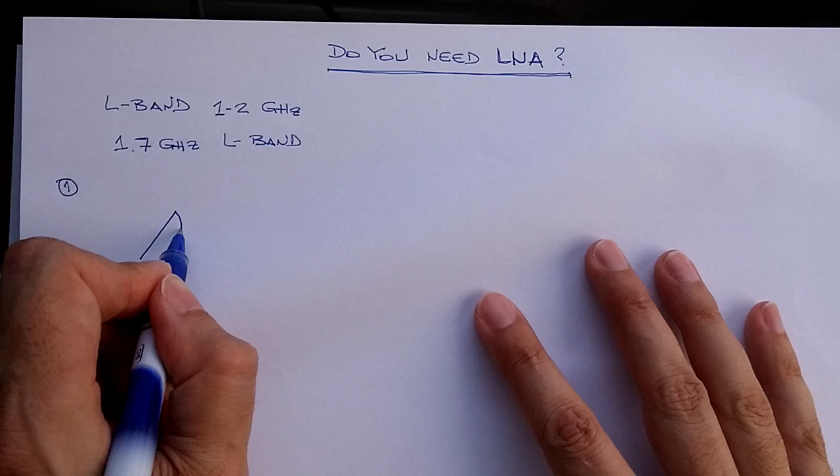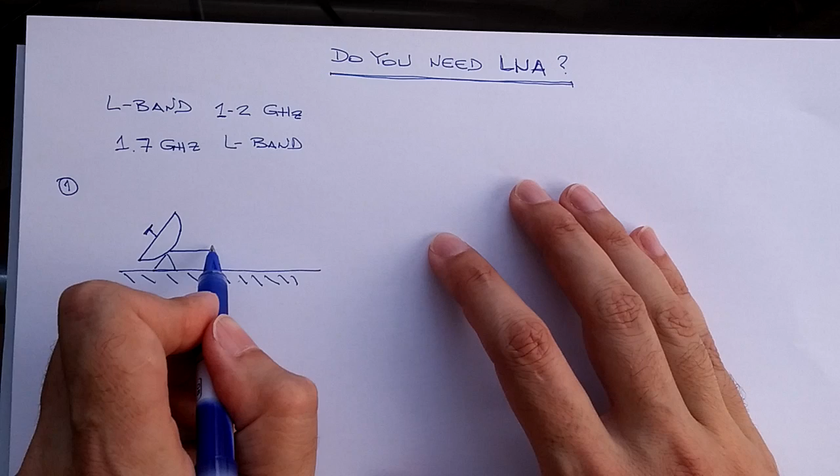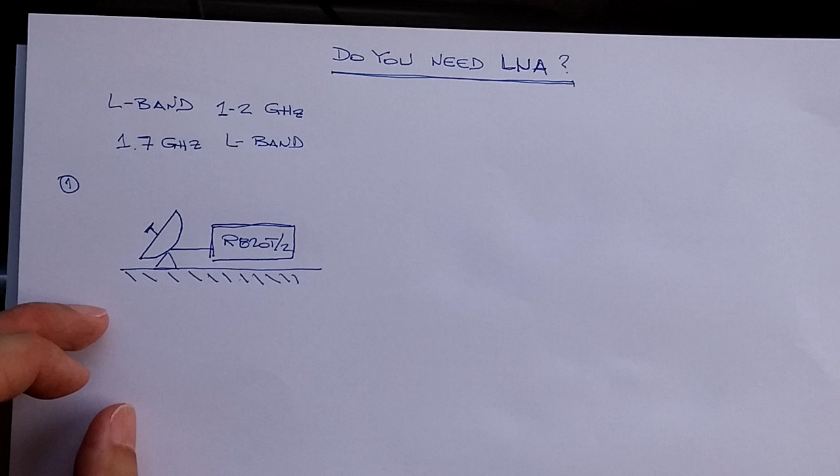And we will take the standard setup where we have the dish antenna for the 1.7 gigahertz, and we have connected straight to the feed, widely used, let's say, DVB-T dongle with R820T or T2 dongle. What we are looking for is the system temperature using the antenna and the dongle.

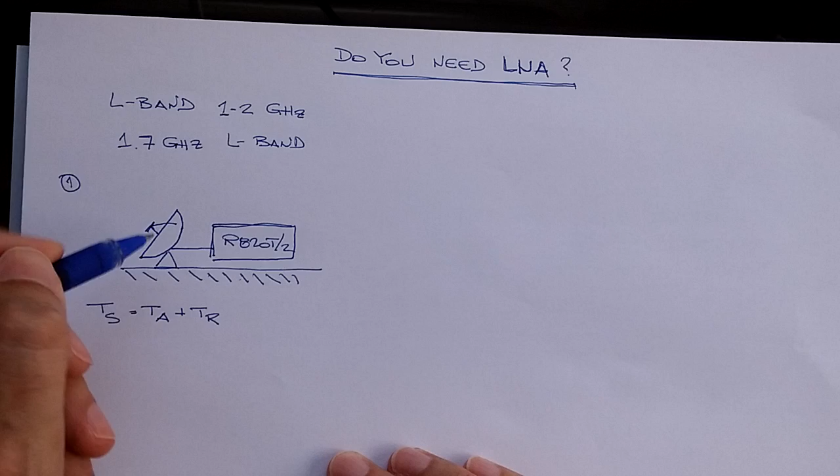So TS is equal to antenna temperature plus receiver temperature. A properly designed antenna should see just the sky, so mainly the temperature of the antenna is dictated by the temperature of the sky the antenna sees. If the antenna is properly designed, this means that the feed is properly designed to not have a spillover. Otherwise we will see the hot ground, and the temperature of the ground is 290 degrees Kelvin.

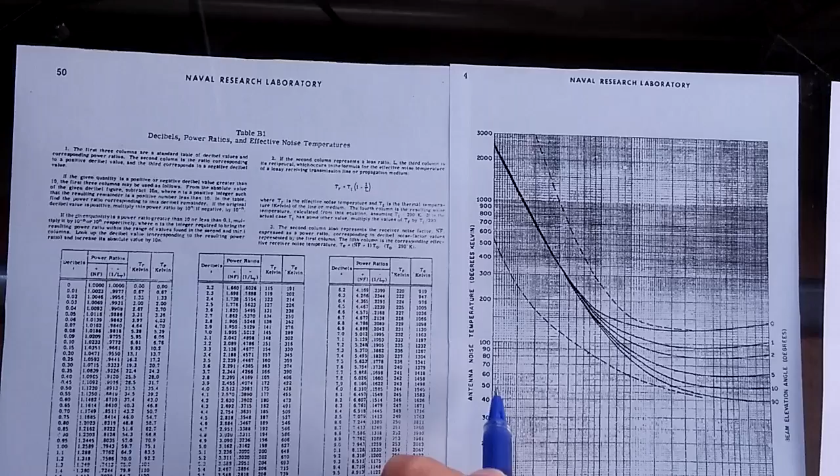It's much better to have an under illuminated antenna, so to have less gain in reception rather than spillover, and to take the noise temperature. So the average noise temperature on 1.7 gigahertz for the elevation, let's say 45 degrees, is 55 degrees Kelvin. So TA is 55 degrees Kelvin.

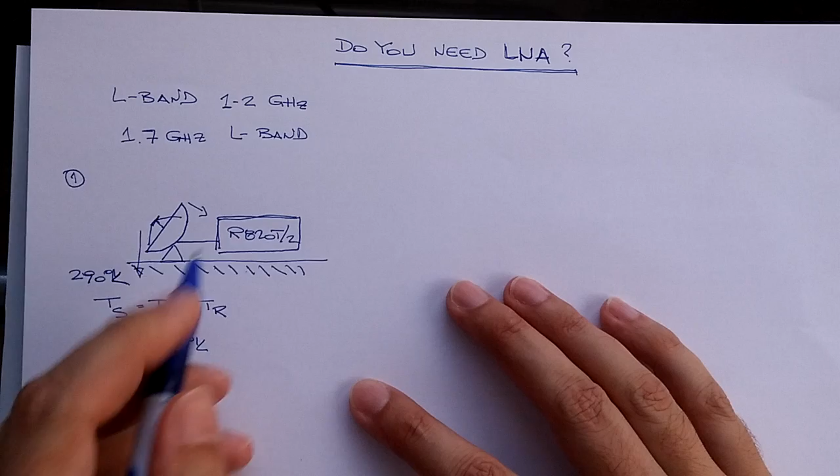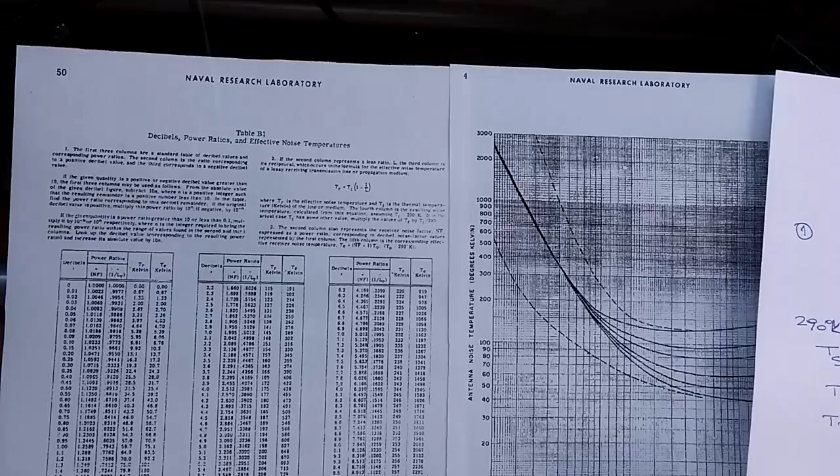TR is actually the noise figure of the dongle. Usually the noise figure of the R820T or T2 is 6 dB. 6 dB is corresponding to 864 degrees Kelvin. So system temperature is 55 plus 864, which is 919 degrees Kelvin.

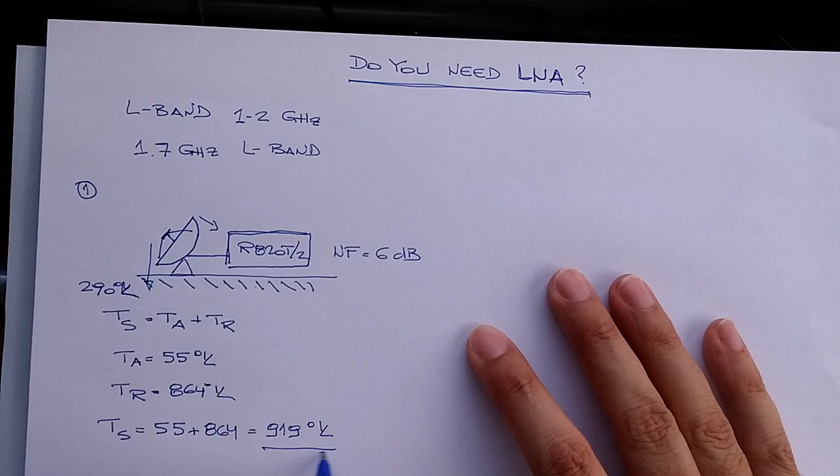Okay, so this is the first situation, the standard one, when we have the dongle straight to the feed. Let's now analyze the same system, so the same antenna with the same feed.

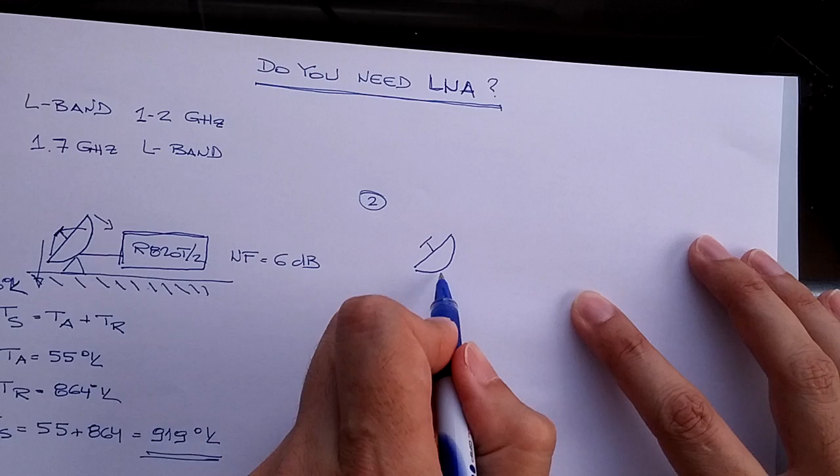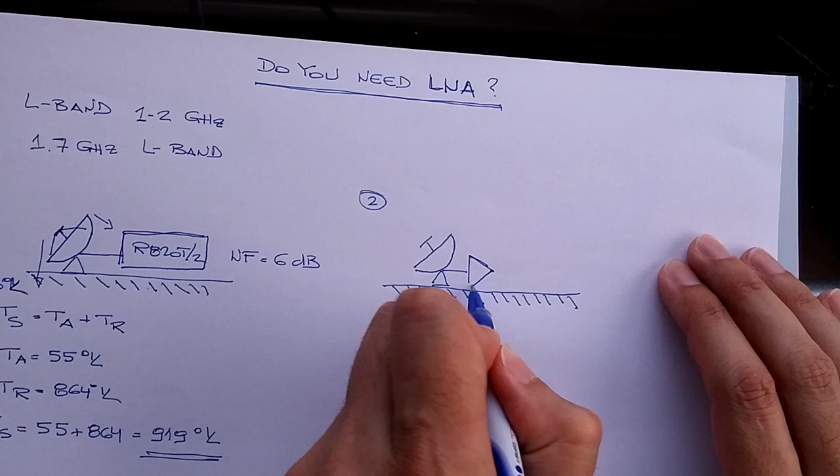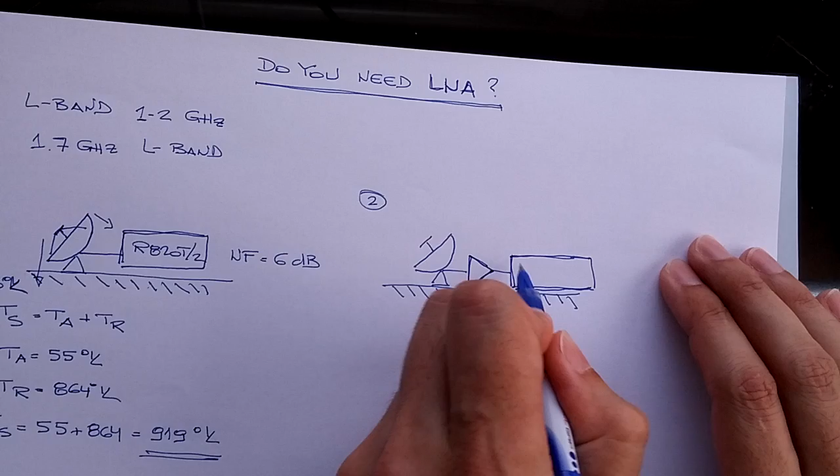But in this case we will first have an LNA, and then the LNA will be followed with our R820T dongle. And we are looking for the system temperature.

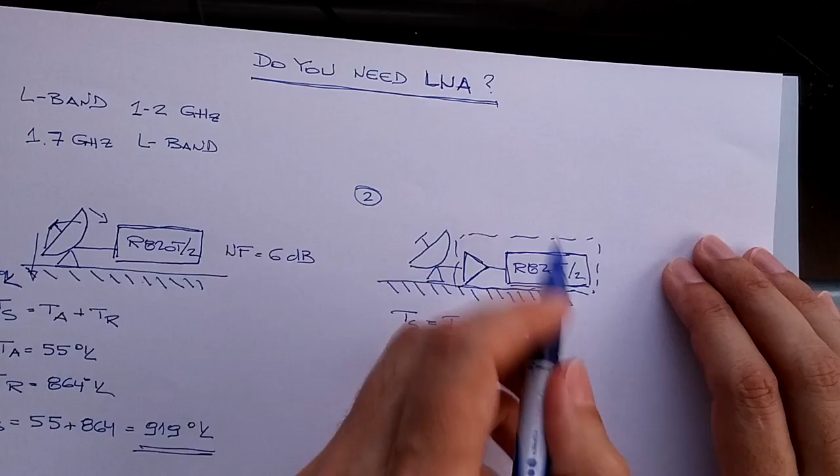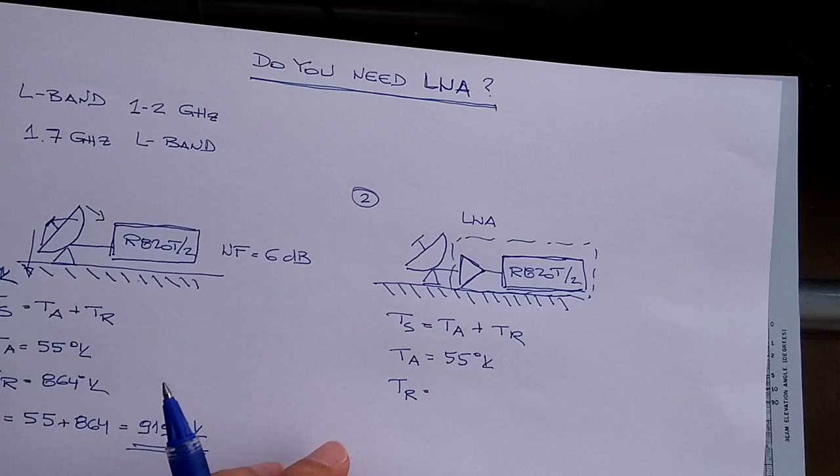Again, TA plus TR. TA, we already found that the antenna temperature is 55 degrees Kelvin. And we need to find out now the receiver temperature. It means LNA and the dongle.

For that we will use the Friis formula for the noise temperature. And the Friis formula goes like this: TR in this case is equal to T LNA plus T R820T divided by the gain of the LNA.

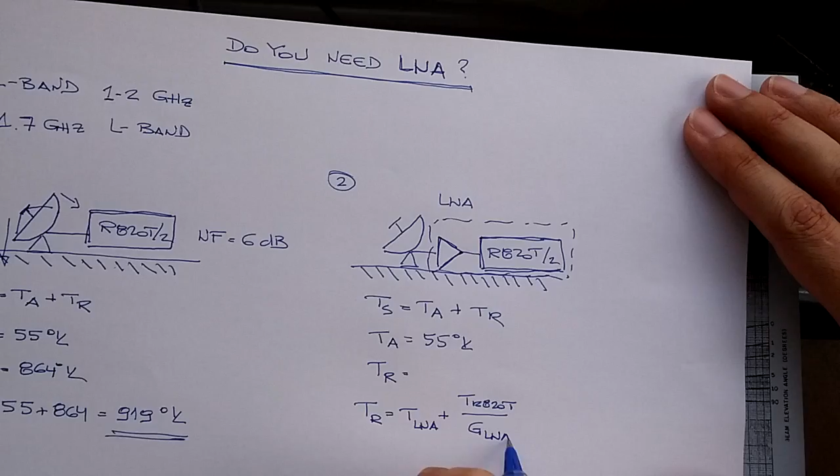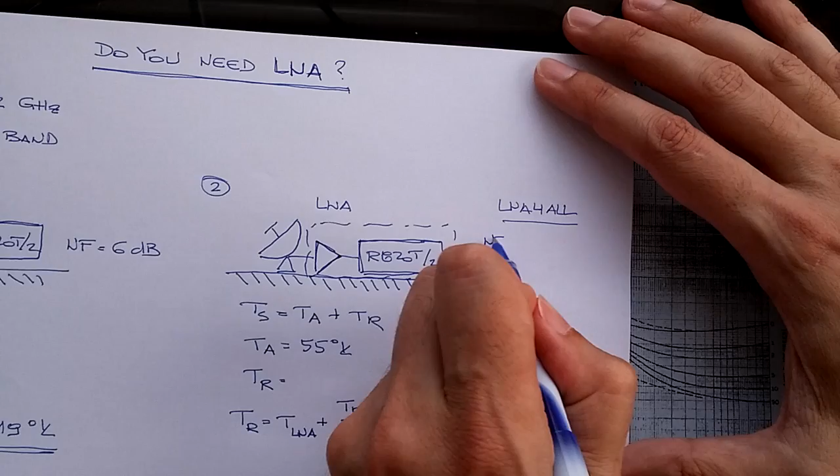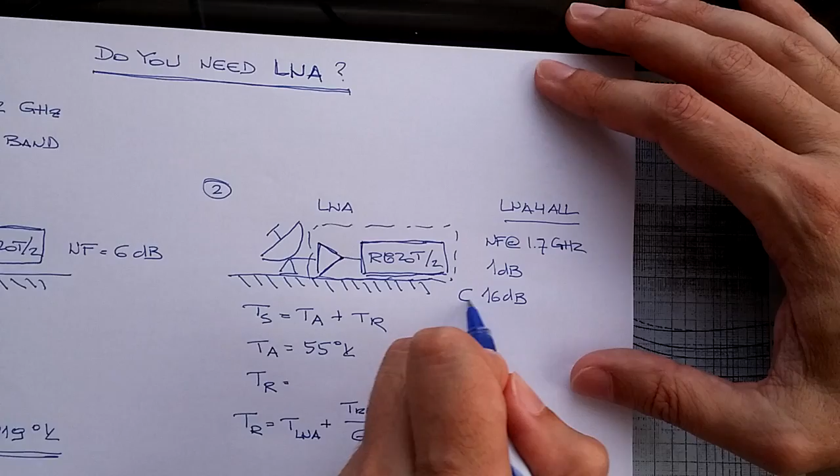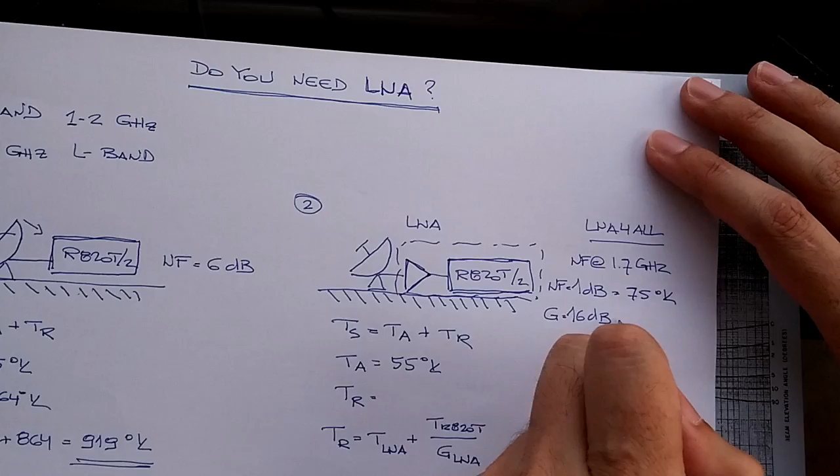Okay, let's use the LNA4ALL. Noise figure at 1.7 gigahertz is approximately 1 dB, and the gain is 16 dB. So this is the gain, and this is the noise figure. 1 dB converted to temperature is 75 Kelvin degrees, and 16 dB in power ratio is 40 - 20 dB is 100, 17 dB is 50, 16 dB is 40.

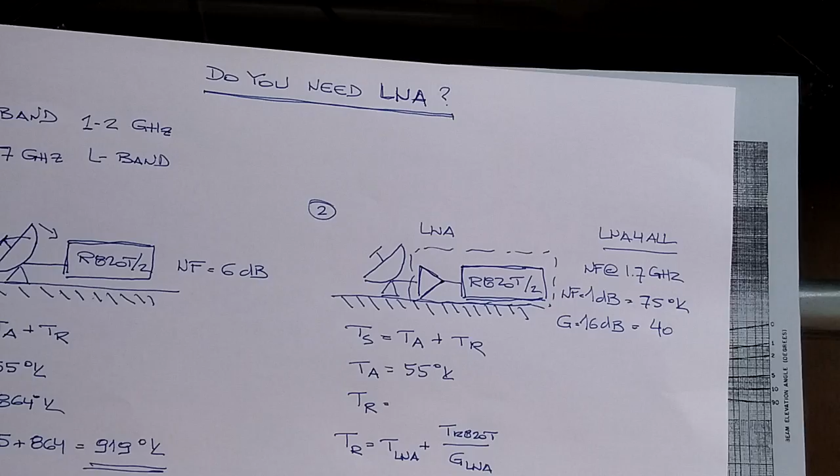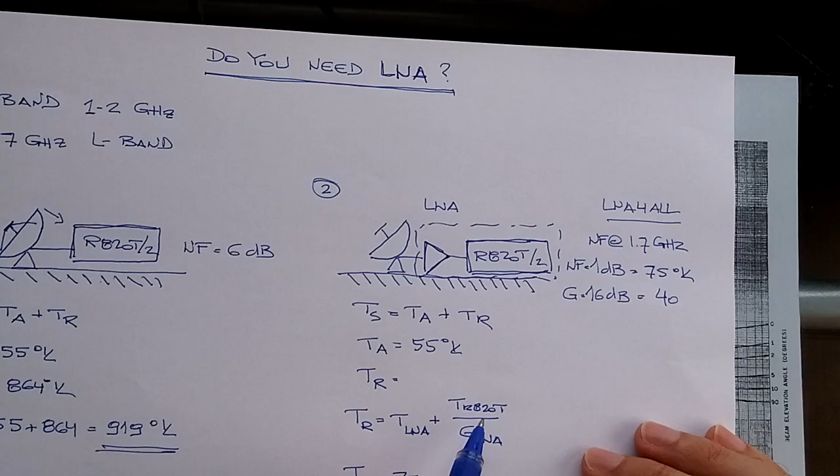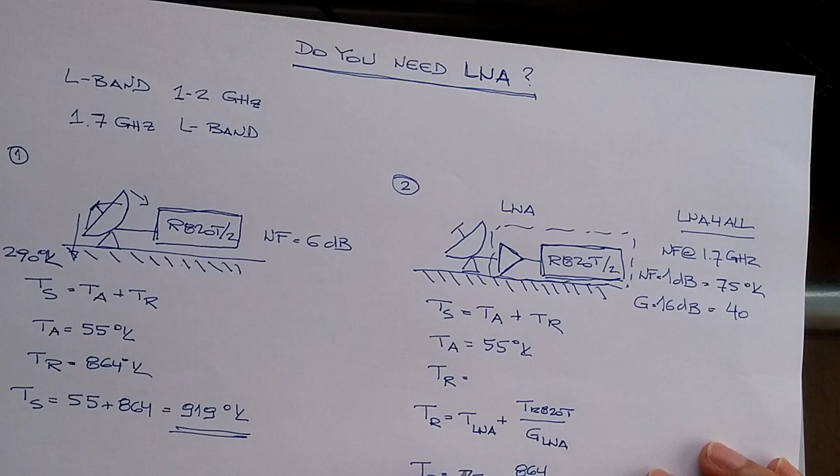Now we have everything to calculate receiver temperature, TR. T LNA is 75, plus dongle temperature, which we found is 864, divided by 40. So from here we can see that the influence on the receiver temperature, or complete noise figure, depends mainly on the first stage - the noise figure of the LNA and the gain of that same first stage - as the second stage noise figure is divided by the gain of the first stage. So we would like to have as low a noise figure as possible and as high a gain as possible.

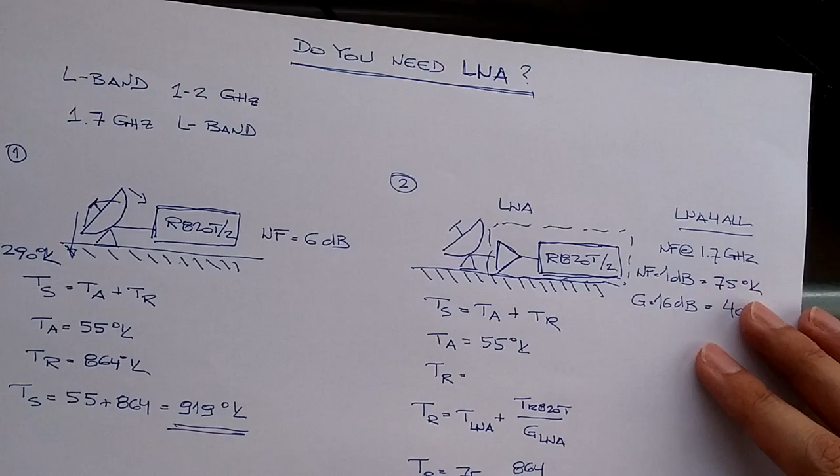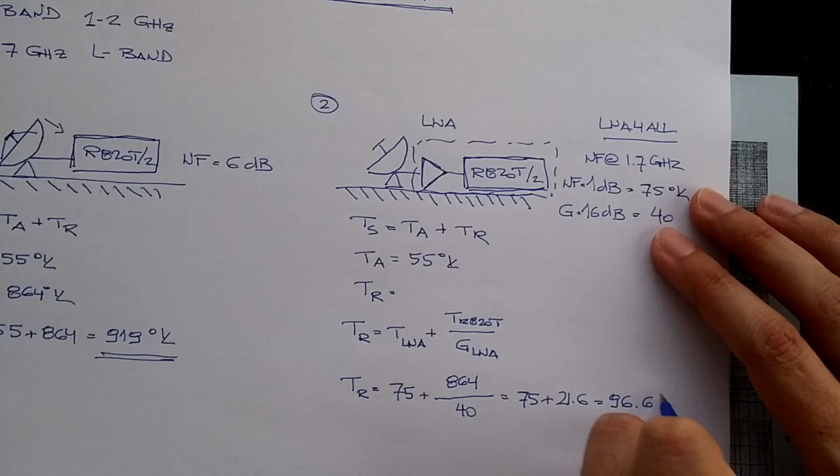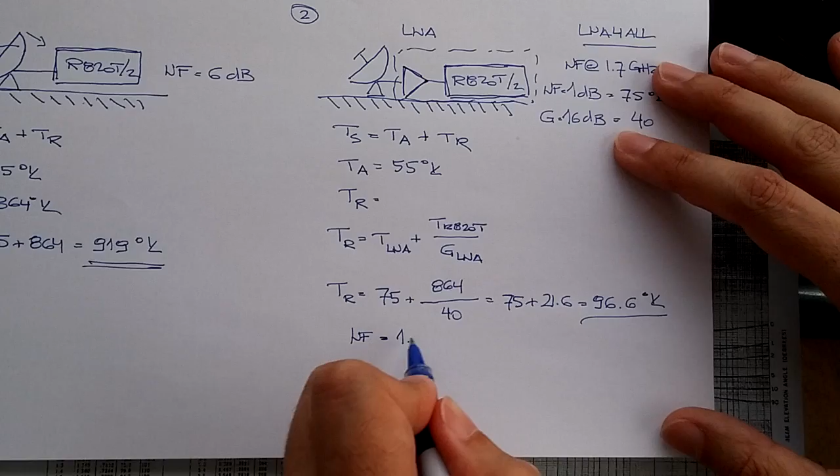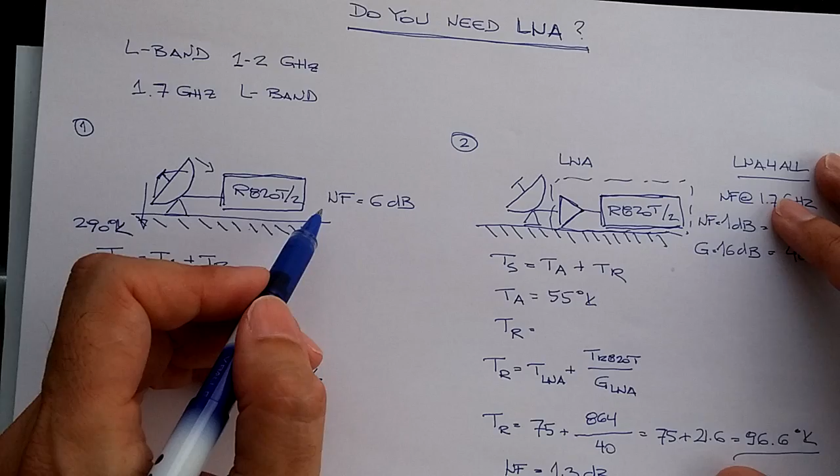So this is 75 plus 864 divided by 40. 864 divided by 40 is 21.6. This gives 96.6 degrees Kelvin. So if we convert that to decibels, 96, okay, 101 is 1.3 dB. So roughly, the noise figure is 1.3 dB. So adding the low noise amplifier before the dongle, we decrease the noise figure from 6 dB to 1.3 dB. So the difference is 4.7.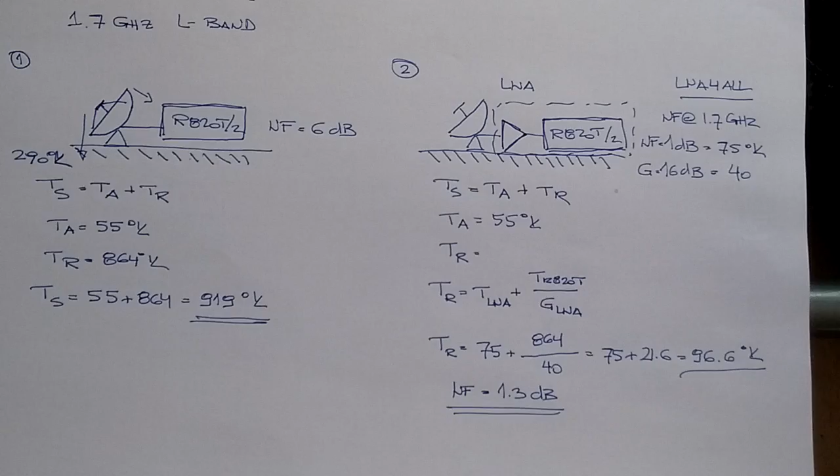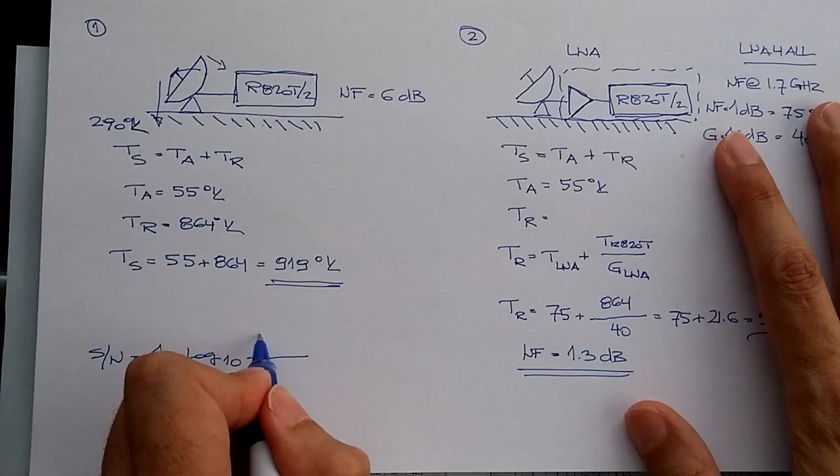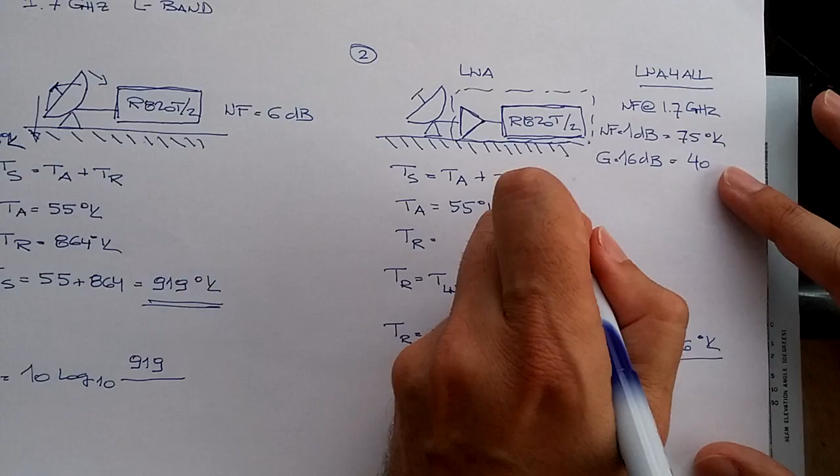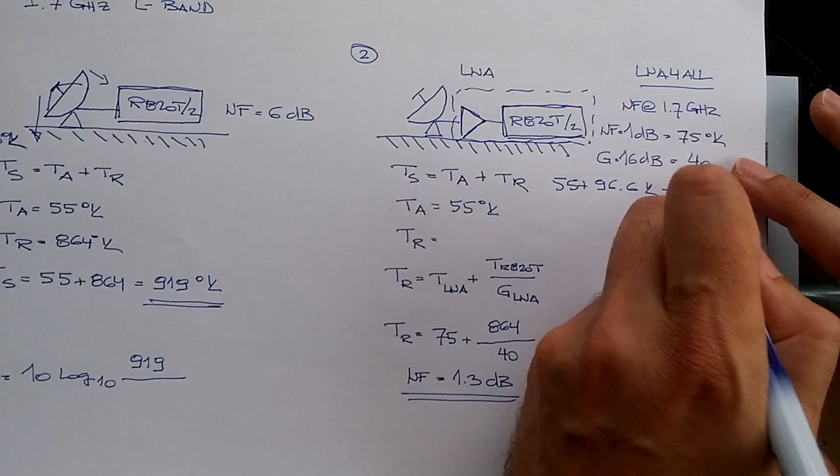So how does this affect our reception, our signal to noise ratio? Now we can calculate signal to noise by 10 times logarithm base 10 of TS without LNA, so 919, divided by TS with the LNA. So TS is TA plus TR - it's 55 plus 96.6 Kelvin, and this is 151.6 degrees.

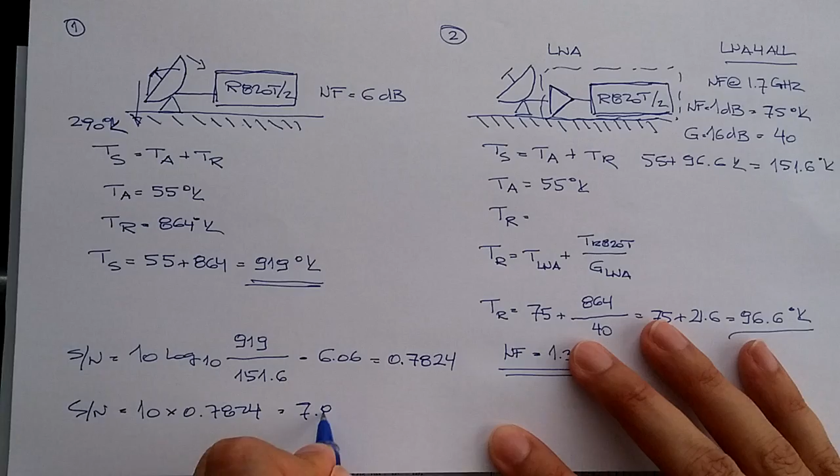So 919 divided by 151.6 is 6.06. Now we need to do the logarithm. It's 0.7824, and we need to multiply this by 10. So 10 times 0.7824, and we have the signal to noise ratio of 7.824 dB.

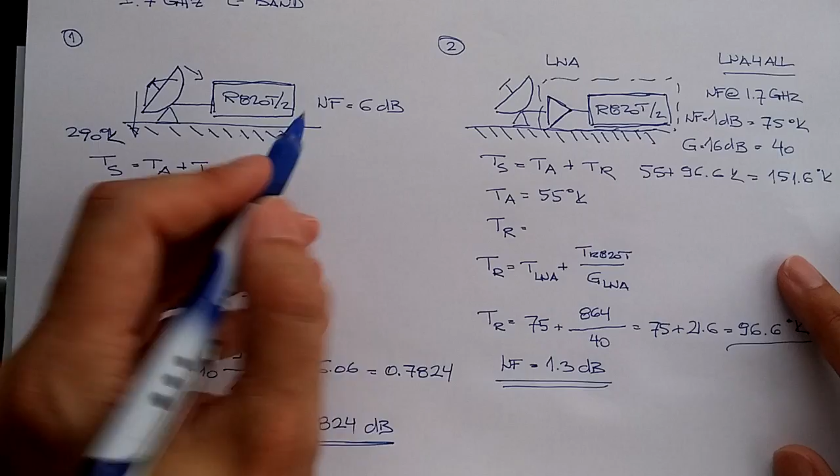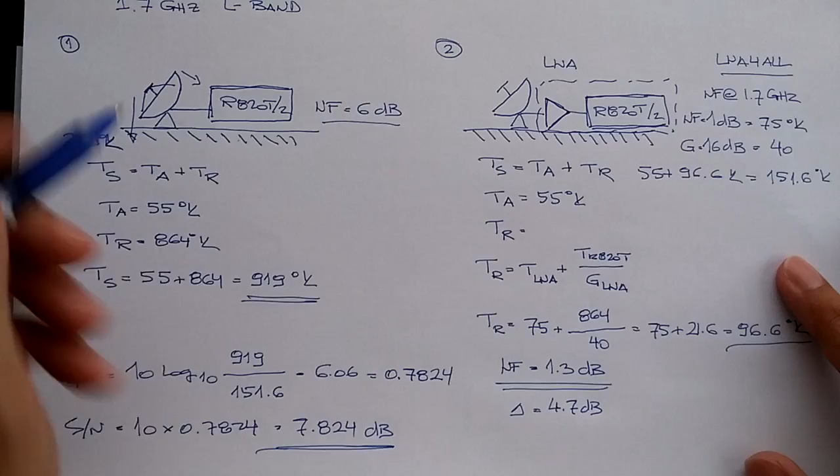Okay, now we have everything calculated. We decrease our noise figure from 6 to 1.3, so the difference is 4.7 dB. We improve our noise figure, and 4.7 dB gives us a better signal to noise ratio for any signal on 1.7 gigs - 7.8 dB.

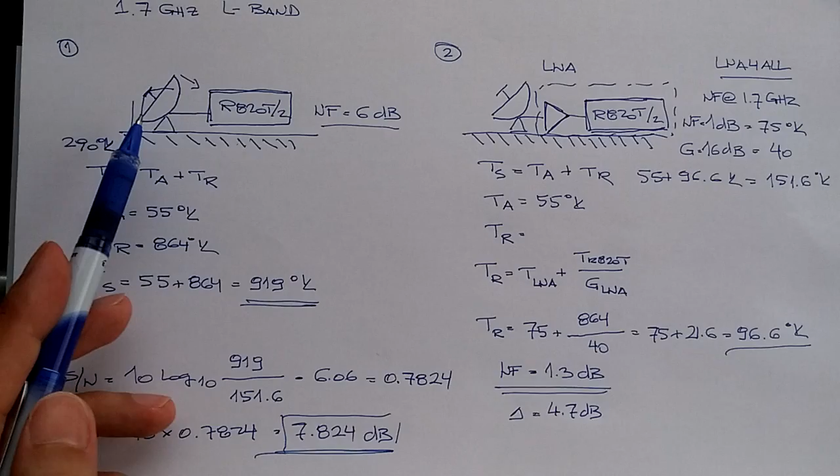At the end, this is how much we will improve our reception. Signal to noise will be better by 7.8 dB using the same antenna, just adding the low noise preamplifier. So that's it. Thank you.